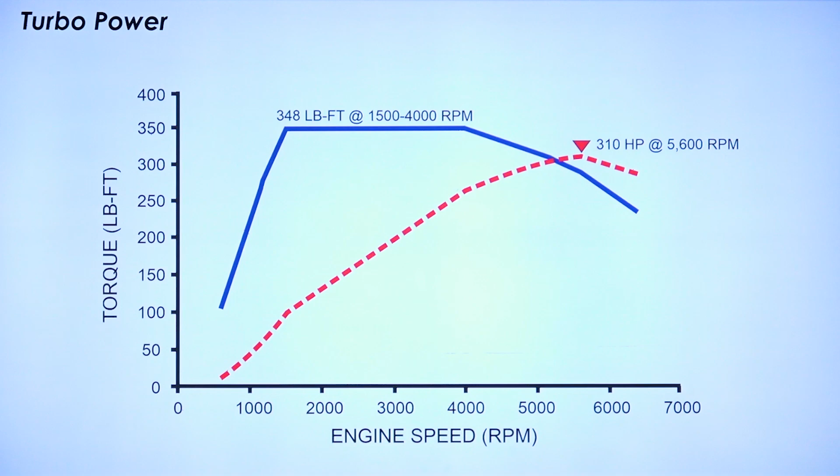So if we look at the torque curve here, you can see it's pretty steep. Power comes on really quickly - 348 foot-pounds of torque, it flattens out right there. Then we look at the horsepower as it comes on and peaks out at 310 horsepower. Now, I grew up in the 80s, I had a 97 Chevy truck, it was the Vortec 5.7. That was quite something for its day, the 350 - I think that thing had like 285 horse. A V8 that's literally more than twice the size of this engine here.

So this thing's got a lot of pickup, excuse the pun, but it drives really well, and there's a lot of technology that goes into it. And that's kind of what we're going to focus on today, is all the new technology that GM brought into this thing to really help it out here and make it what it is today.

There's stuff like a dual Volute turbocharger. Now you're going, how many Volutes am I supposed to have on a vehicle here? Well, I'll explain that here in just a second. It's a different style turbocharger, different internal design. It's got a new evaporative emissions purge pump. While that's not going to affect the performance of the vehicle, it's going to affect the performance of the evaporative emission system. And because of the turbo, that's why we've got this new EVAP purge pump. I'll explain a little bit more about that.

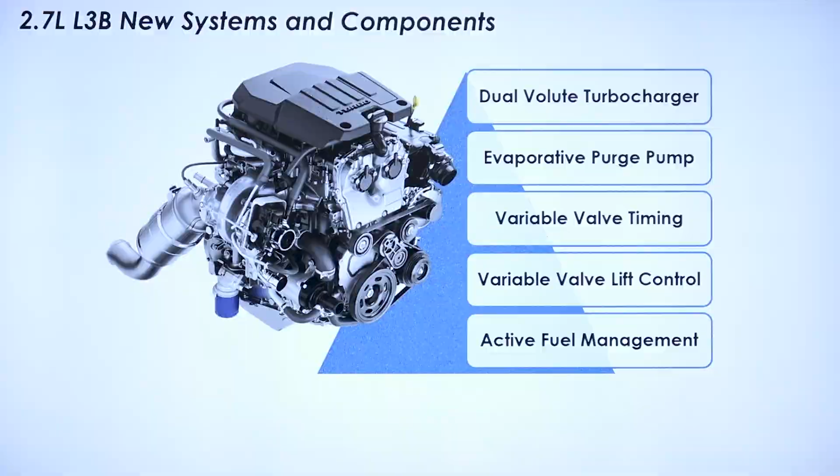Then this truck has a multi-configuration of valve timing. So this is going to have variable valve timing, which will advance and retard each camshaft individually. And then it's got variable lift control, which has sleeves on the camshaft with high and low lift actuation of the valves. It's also got active fuel management, so it can kill multiple cylinders at a time. We're used to seeing that on some 5.3 V8 engines, but GM's doing it with a 4-cylinder engine here - very impressive. So now you put this variable valve timing, variable lift timing, and active fuel management together, and it makes this a really efficient, well-running engine, but with a lot of service opportunities as well.

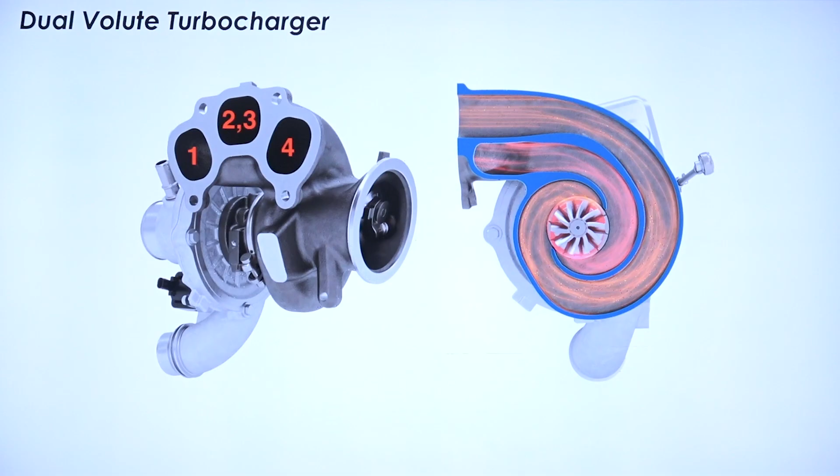As I mentioned with that dual Volute turbocharger, we look at the image here and you can see it's got multiple passageways. What it's really doing is helping balance the exhaust flow coming into the turbocharger. Due to the proximity of it - think about exhaust headers - they're not all the same length. Each tube is wrapped around differently with the goal of scavenging enough exhaust so there's equal passageway before it gets to the common tube there. That's really what's happening with this dual Volute turbo. If we look at this drawing here, you can see where it's located. Obviously the pathway from cylinders 2 and 3 is much closer or shorter than it would be for 1 and 4.

2 and 3 are going to share a common passageway, and then 1 and 4 are going to come a little bit longer route, and they're going to be timed perfectly. So the pulsations are going to be constant and perfectly timed to help improve the efficiency of the operation of the turbocharger on this vehicle.

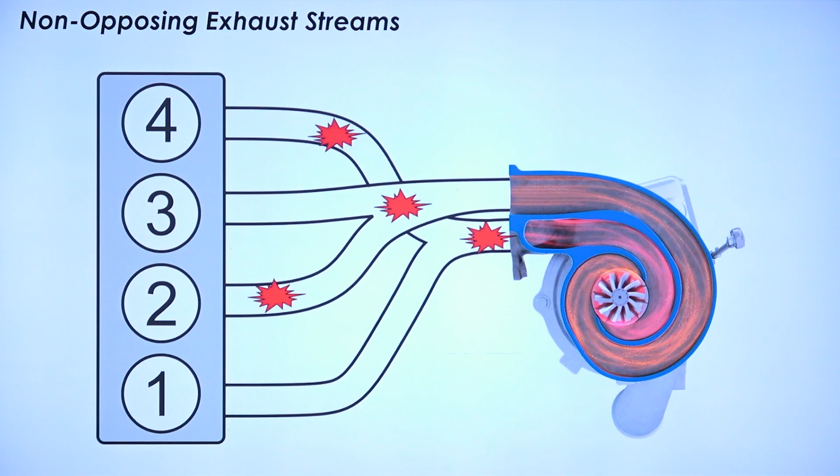Man, I gotta tell you, it builds boost really quickly. I hopped on the expressway with it the other day, very effortless acceleration getting it up to speed. Now, as I mentioned, there's some changes on the EVAP system.

So I'm gonna head over to the drawing here. As we look at this, we've got kind of what seems to be our normal EVAP system. We've got our vent, we've got our purge. Fuel is going to come into the tank here. We've got our fuel tank pressure sensor reading the pressure. It's going to be connected to the vapor canister. We're going to trap or draw in fresh air, whatever is being commanded at the time. So we've got our normally open vent valve.

But then we follow the pathway over here to the purge solenoid, which is going to be closed, attached to engine vacuum typically. However, think about this being a turbocharged engine. In a small turbocharged engine, it's going to be building boost, and we're going to have pressure right here rather than vacuum as we're used to seeing. And so yes, this does go in at the turbo inlet here. That's not a misprint.

So in order to prep this for a time when there is vacuum applied on the engine rather than boost, this thing is going to pre-charge the EVAP system. It's going to draw vapor, vacuum, through this purge pump, and then it's going to pressurize the system right here. So we're going to have some pressure pre-charged, and when the conditions are right—let's say the driver's got their foot off the throttle or it's idling—the purge solenoid can be commanded on, and then the purge gases will be directed into the turbocharger inlet.

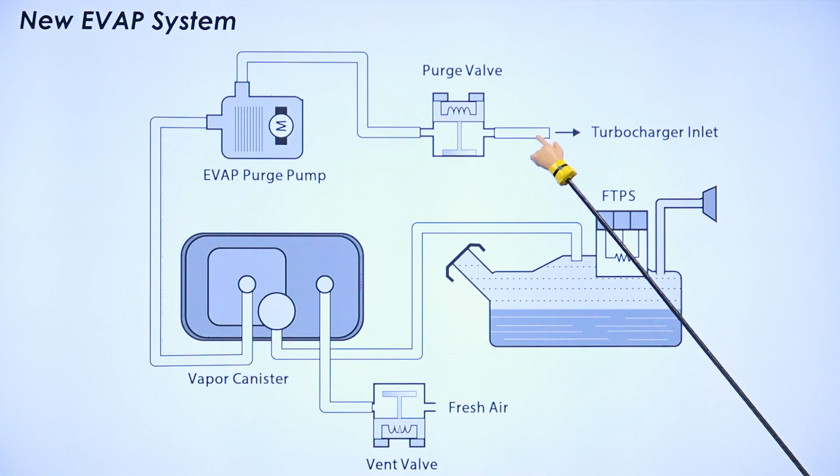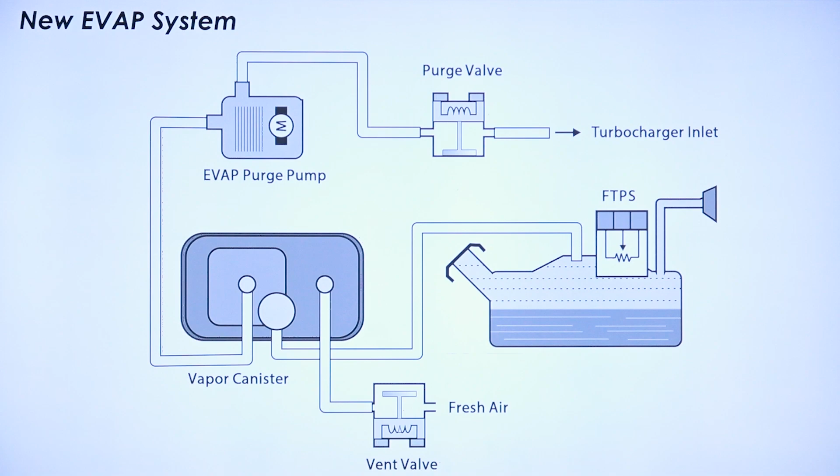So a new component here—word from friends at dealerships is they're replacing a lot of these things. By the time they get out of warranty and come into our bays, who knows? But more parts on a system mean more opportunities for us. So hopefully you understand and can appreciate this new componentry added to this particular engine.

Now I did us a favor here. I've got some covers pulled off this truck. We're going to take a look at it here in a little bit. However, it takes a little bit of work to get this shot right here. We got all the air intake duct work, and imagine it goes down around the side. On the passenger side, it's connected in by the turbo over there. So it takes a little bit of work to get that out. So I just took this picture here.

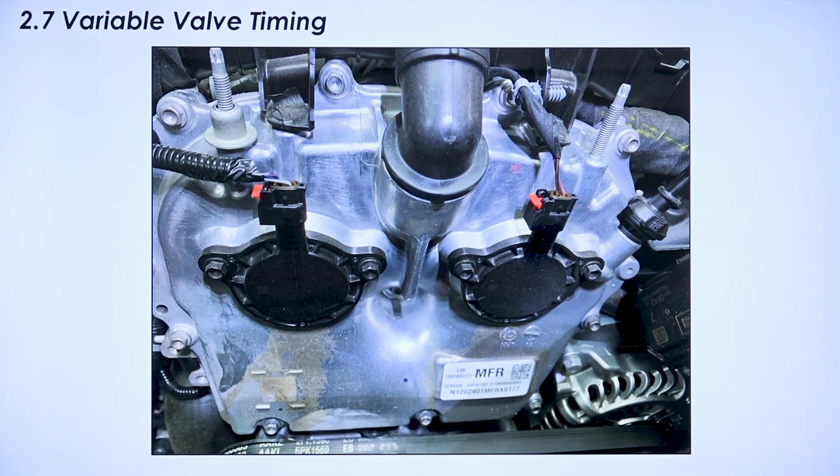Now this isn't like the VVT components I've got sitting on the table here. This is one of the electronically controlled ones. These are more of a hydraulically controlled system on the others, but these are a magnetic solenoid. So if you think about the end of the camshaft or the actuator, the gear on this 2.7 liter engine...

It's got basically a button on the solenoid—think of a ballpoint pen. You click it, it releases it. Now it can change the timing of it. And then it'll click it again to reposition it there. So that's really what's happening on the front of this engine here with these two actuators. These are simply actuating that ballpoint pen, if you will. And now there's a magnetically controlled actuator inside of that.

There's actually a technical service bulletin out for that, so maybe after this is a good opportunity to just pull up in service information, 2022, 2023 Silverado. Yeah, aftermarket service information's got really a lot of good coverage on these things already. Look up that technical service bulletin. I just went under VVT or engine mechanical and then looked at valve timing and searched TSBs. There's some good information stored in there.

But then as I mentioned, there's also the variable lift and active fuel management. In a minute, I'm going to get into this further and show you some shots underneath the hood of the truck. There is some scan tool testing we can do, not as much as I'd hope for at this point, but I'll show you some examples using popular aftermarket tools, stuff we can do if we're testing these things.

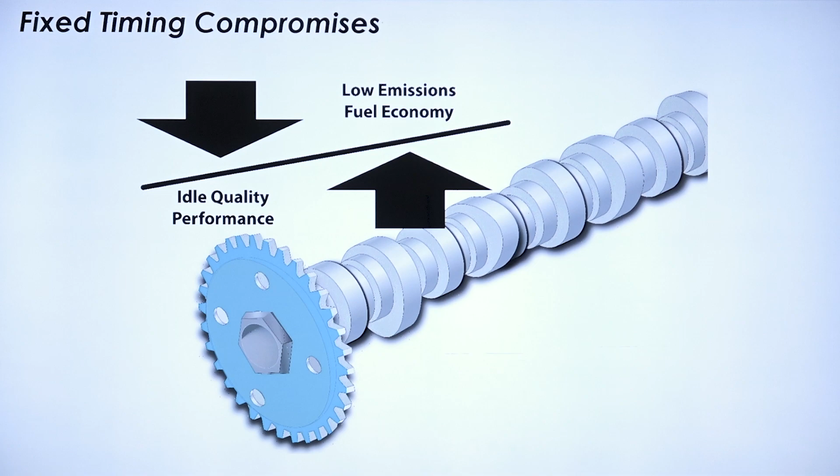But in today's world, emissions come significantly into play, so we've got to balance things out a little bit. Make sure we're getting the best performance we can out of the engine, as well as driver comfort, right? We can't have a big lopey cam here. Some of us might think it's cool, most of our customers aren't going to though. But then we also have to have good fuel economy and clean air coming out the tailpipe. So traditionally, vehicle engine engineers had to balance that out and go, okay, how can I get the best performance out of this cam with the best drivability and the best fuel economy, emissions, etc. Well, now enter the new technologies of advanced valve actuation, and really all that stuff's out the window.

So as we look at the different types available here, we've got variable valve timing, which is going to advance or retard the camshafts one way or the other. Advancing it is going to help us get more performance, but retarding it is going to give some valve overlap and help clean up on the emissions side, give a little bit of internal EGR there.

Variable lift, well, if we don't need to open that valve all the way and get a big gulp of fresh air in all the time, we can help with the efficiency of the engine by giving it really just what it needs at that time. And now put them both together, well, it's kind of the best of both worlds here, and we're seeing that on more and more of today's modern engines.

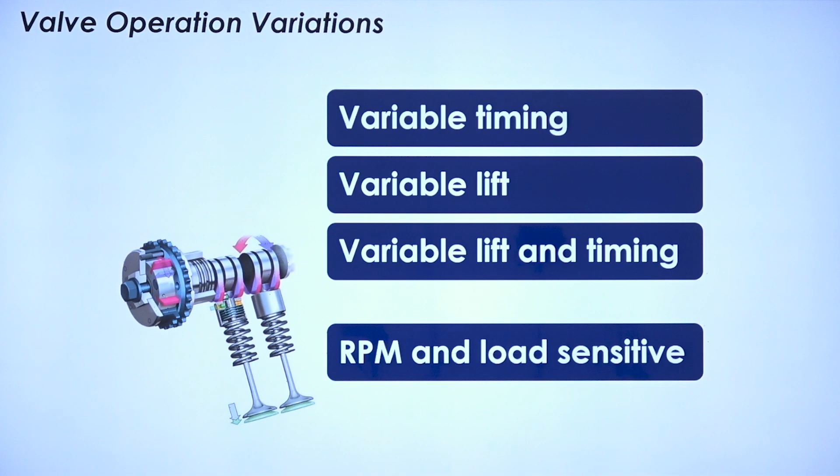And these are all RPM and engine load sensitive. We don't want to be actuating this stuff and making major changes while the vehicle is idling or light acceleration. Typically it's under open acceleration or steady state cruising down the road where the PCM is going to make a lot of these adjustments.

So some of the big benefits here, first off, is increased volumetric efficiency. It allows it to breathe better. And as I've said before, these engines are primarily an air pump. We're getting air in, we're getting air out, we're creating work with a crankshaft in between there. And so the better we can get air in and out, the more efficient this engine is going to be. Advanced valve train actuation certainly helps out with that. On the flip side, it's going to reduce those pumping losses.

Think about if you get a clogged or closed throttle blade, it's a restriction on the air intake. That's how manufacturers for many years have throttled the engine, right? We close the throttle blade, but as the piston's coming down, we're drawing vacuum. That's a parasitic loss, negatively acting on the crankshaft. So by keeping that throttle blade open, we can allow the engine to breathe freer and much more efficient.

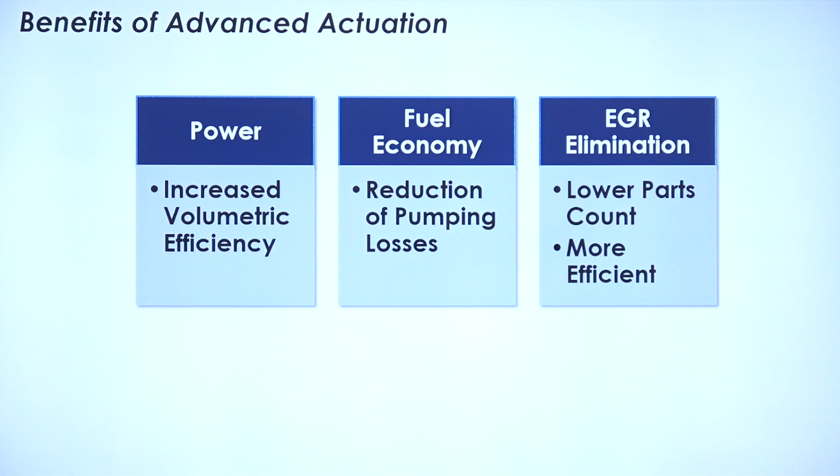Think about early diesels. That was one of the big advantages to them. There was no throttle blade, so it made it very efficient. On early applications, manufacturers simply eliminated the EGR valve because with valve overlap, we could scavenge some of the exhaust into the intake. That would cool down the combustion process and eliminate the need for EGR. Modern vehicles now we're seeing EGRs come back on so it can further clean the process up.

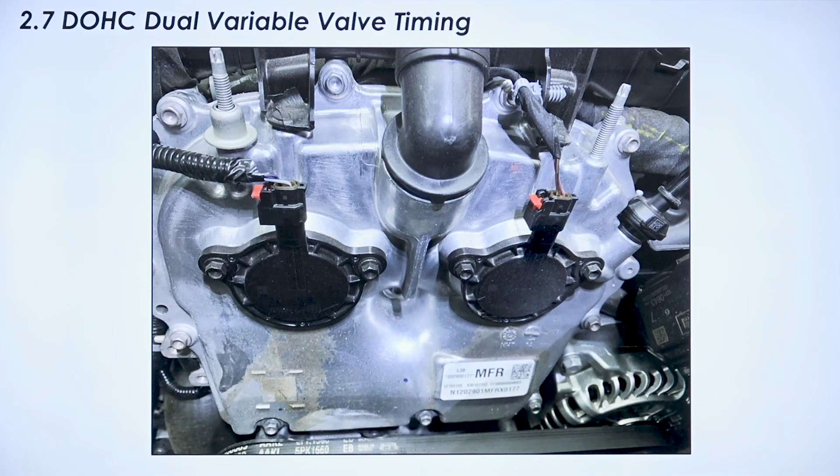As I mentioned and showed you this image earlier, this particular engine has control of both the exhaust camshaft and the intake camshaft. Think about some of the early applications of VVT that you may have worked on. For me, I think of the late 90s Ford, like the Escort with the Zetec engine - not to be confused with the Honda VTEC - but it controlled the exhaust camshaft, and that was normally in the full advanced position, and then it would retard it.

I think it was up to 17 degrees for that EGR effect. As other manufacturers came on board with this, they started advancing the intake camshaft for that performance effect. And then we've got engines like this that control both camshafts - it will advance them or retard them.

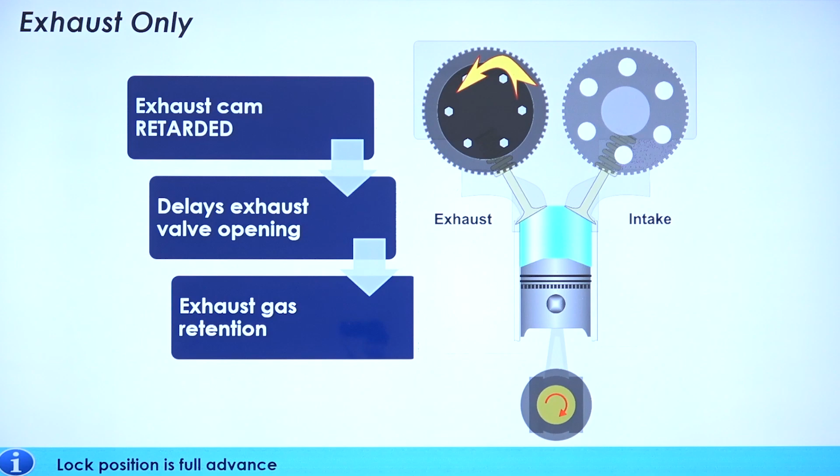So as we look at some examples here, this one being exhaust only, now the exhaust cam is going to be retarded here. By retarding that exhaust camshaft as related to the crankshaft, now it's going to delay the exhaust valve opening, and that's going to help retain some of the exhaust gas in the combustion chamber. Now as the intake valve opens at its normal time, there's going to be exhaust in there. So we're going to get a burst of exhaust, and it's going to pull it right back in. It'll stay in the combustion chamber for that EGR effect.

Now as we look at intake-only systems here, the intake cam will be advanced, and this is going to increase valve overlap. It's also going to have some of that exhaust gas retention.

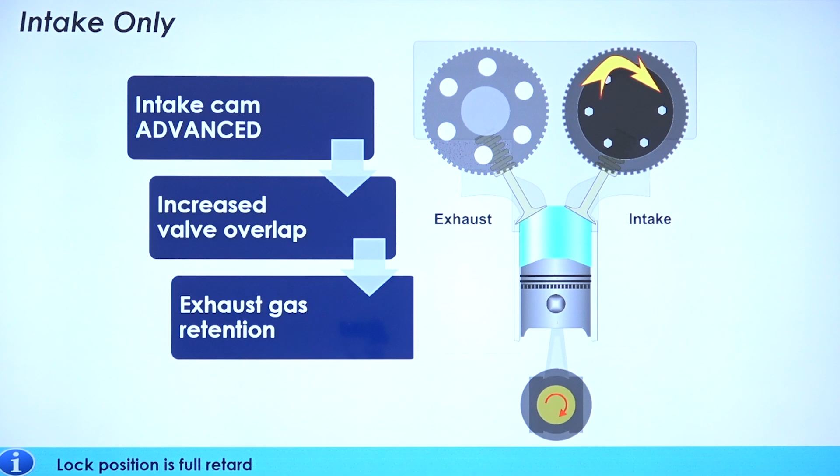But think about some of the hot rodders in the audience today. I see a lot of familiar names logged in here, and I know some of you have played with drag racing back in the day. We used to have gear drives of camshaft, and you're setting up an engine - is this going to be a round track engine that's going to live at high RPMs, or is this going to be a drag race application? We would set up the camshaft timing a little bit different dependent on the needs of that engine. So there's benefits of performance to be gained from the intake opening here.

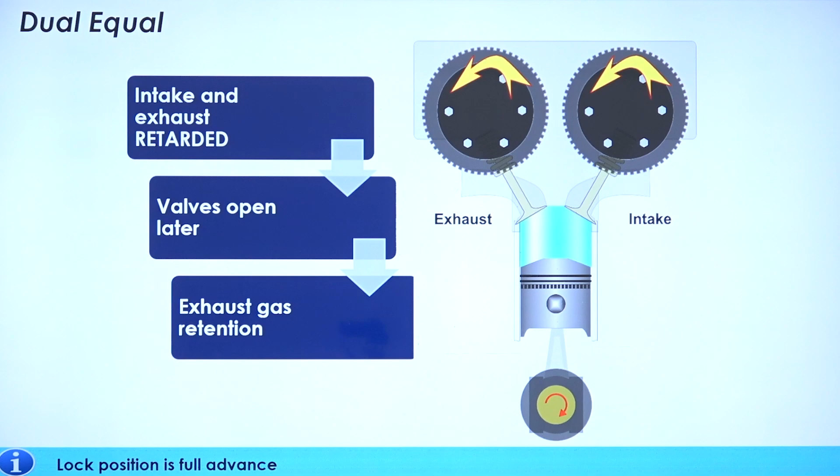Well, over the past 10 years now, we've seen manufacturers using what's referred to as dual equal positioning here. This is where the exhaust and the intake can be retarded, and then the valves will all be open later, helping with that exhaust gas retention. Or dual independent, which we see on today's engines such as this 2.7, where they're both going to be retarded and can be advanced here, and it's going to really help with that engine breathing more so than simply emissions.

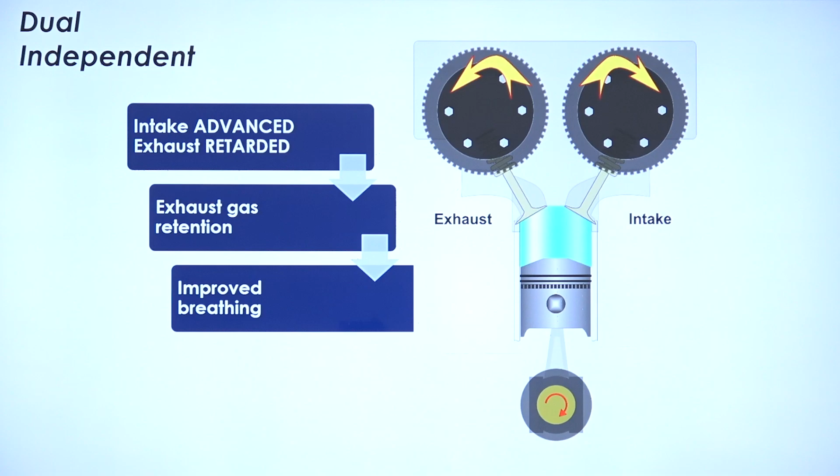So let's move over into the variable valve lift section here. We talked about moving the cams forward and backward, but now we're going to talk about opening and closing the exhaust valves and how far do we open those. You may be familiar with this with the Honda systems - they've been using this for many years. Even I think my wife had a 2001 Honda Odyssey with a 3.5, and I believe that actually had the variable valve opening there.

So as we look at the image here, now under high lift application, which is going to be typically your default, we can see where the valve is going to start opening here at 0 degrees crank. And now as it's being commanded open, we can see the lift, the amount of lift as indicated in the blue trace here.

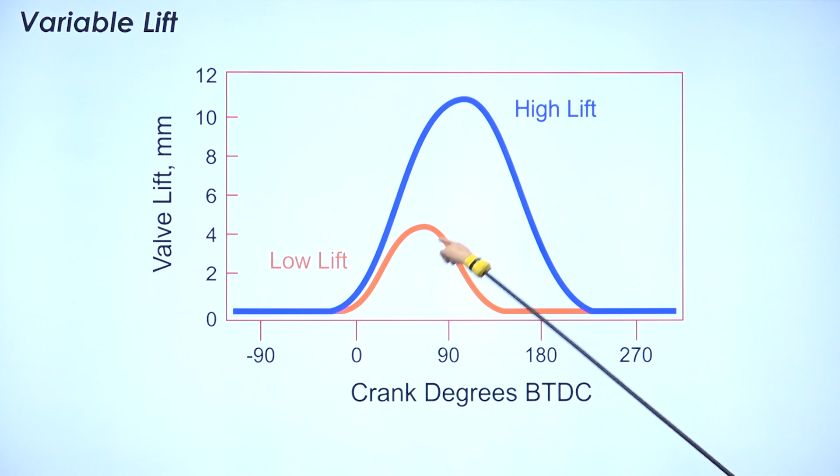Under certain applications and conditions, the powertrain control module commands the system to shift. In this case, it literally slides the camshaft over to apply a low lift opening. This can be done for efficiency, if we don't need all that air in or out, we can get by with this, and that's what the manufacturer will use.

Looking at the components of this variable valve lift system, we've got the valve, which is what we're ultimately attempting to control. Then we've got the dual feed lash adjuster, and the inner switchable roller finger follower, which has multiple rollers on it. You can see the camshaft there, and that's going to actuate against one or the other.

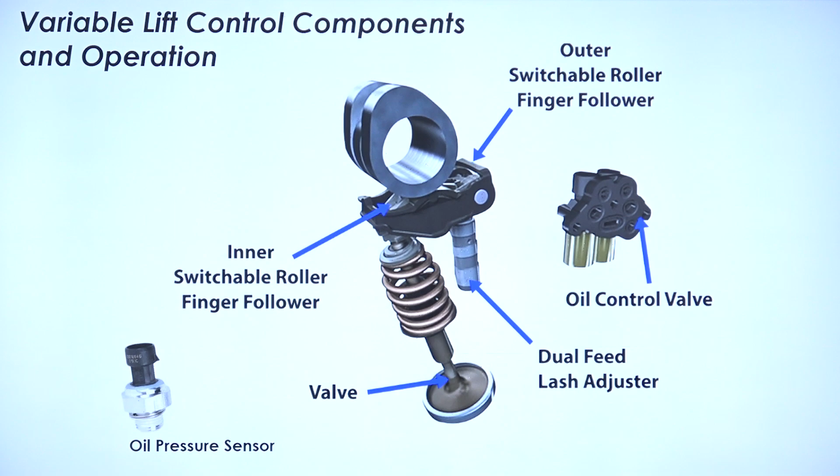Many of these are controlled by an oil control valve, and we've got the oil pressure sensor, which is a feedback device. As we see that state of oil change, it sends oil through a passageway to actuate the system. This pressure sensor tells us yes, I've got oil pressure, or no, oil pressure has been removed. So as we put this together, that's what helps us achieve high lift or low lift valve opening based on whichever is commanded at a particular time.

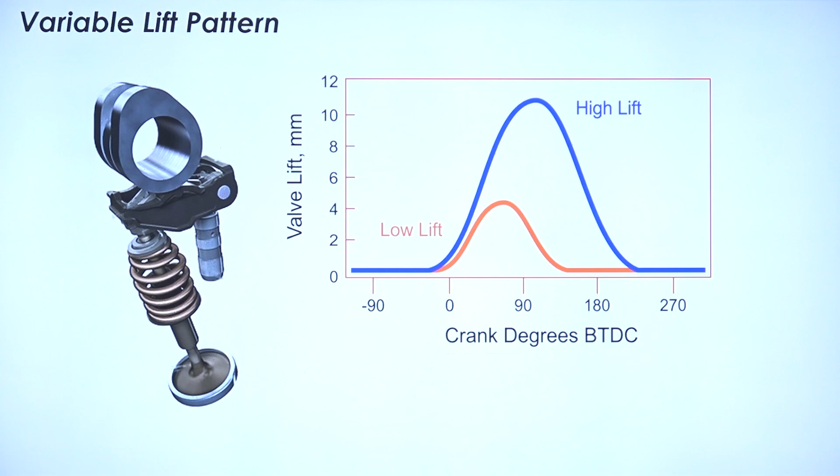Let's take a look at a snapshot we took of this truck earlier. As we look at the scan data, you can see my cursor, and this is a snapshot of what was being read at that point in time. We're cruising down the road at 50 miles an hour, trying to keep it below that 55 mile an hour speed limit. You can see a couple times where we blip the throttle, and at this point the throttle's pretty steady.

Here's our control solenoid valve command on. At this point we can see the oil pressure, which is the feedback from the system, and we can see the engine load changing. But if we look further down, as I get into the throttle a bit further, it's going to command this off. When this is commanded off, it goes to the high lift actuation, and this is where we see the feedback on the oil pressure increasing.

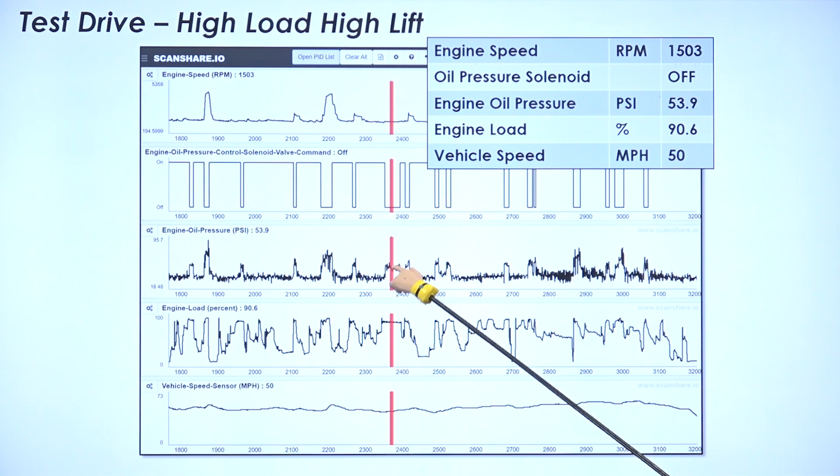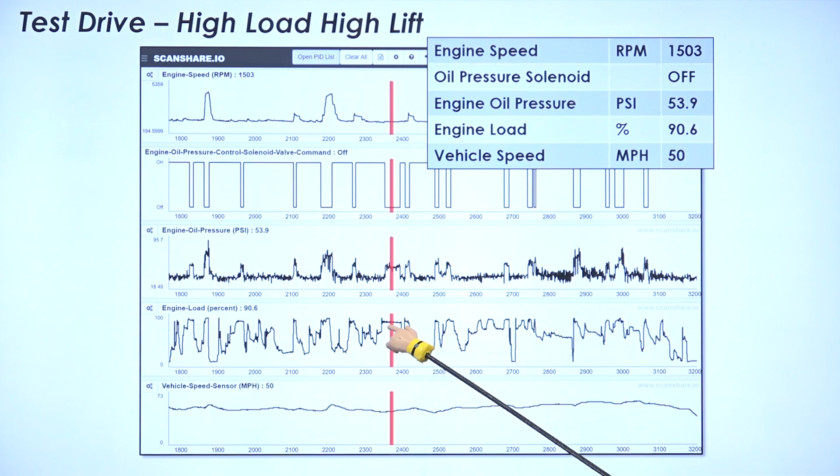We can see just as the system goes on and off, these are the changes occurring. If I fast forward and move the cursor over a little, now we can see where the system is commanded off, the oil pressure will raise. Think of this as defaulting to the off position, which is our high lift system. So when the control solenoid is turned off, we see increased oil pressure, used primarily at higher engine load actuation.

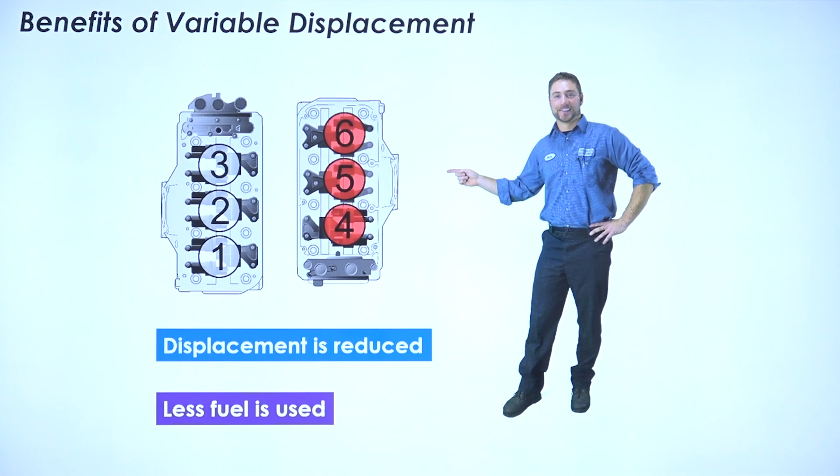That brings us up to variable displacement. This is a 2.7 liter engine, but not always, that's the max capacity of this engine. If you think of other V8 or V6 applications, the control module would cut out various cylinders at different times to help improve efficiency. One of the biggest examples of this in recent times has been the 5.3 liter General Motors application. So how is that accomplished?

First, it's going to disable the valve opening, done through various methods, which I'll explain in a bit. At the same time, we want to disable fuel, but never do we want to disable spark. The engine or vehicle manufacturers don't want to disable spark. We want to get rid of fuel, because imagine if the valves were closed, we're not breathing, not taking fresh air in, not getting rid of exhaust, but the fuel was continuing to spray. It's going to be a flooded cylinder, you'll wash the cylinder walls down, you might hydrolock it. That's why fuel has to be disabled.

But who cares if there's still spark there, right? So it's very difficult to turn the ignition on and off, or there's really no need to do that. So it's going to disable the valve opening, which is going to create kind of a cushion as that piston continues going up and down.

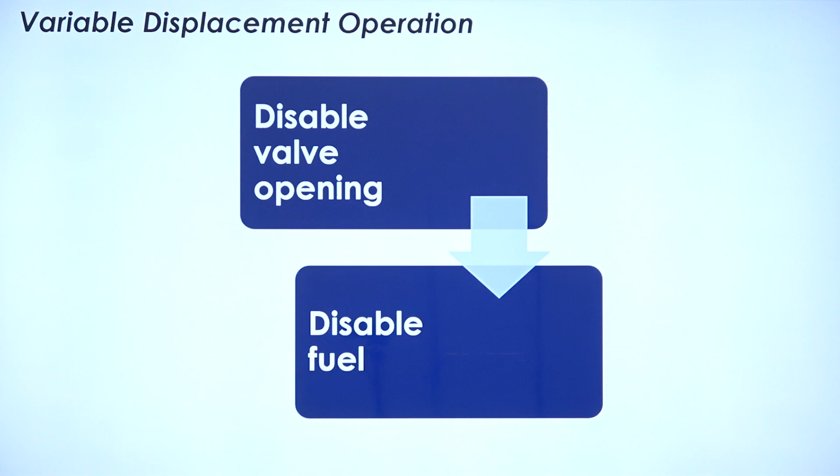You might think, well, it's going to drag or it's going to compress. Well, what it does over time is it builds kind of a spring-loaded cushion of air inside there. If you close both valves, now it's going to go down and it's going to have a spring pressure down, and then it's going to have a little bit of resistance, but then on the way up it'll have that opposite effect. And so it kind of equals itself out at that point.

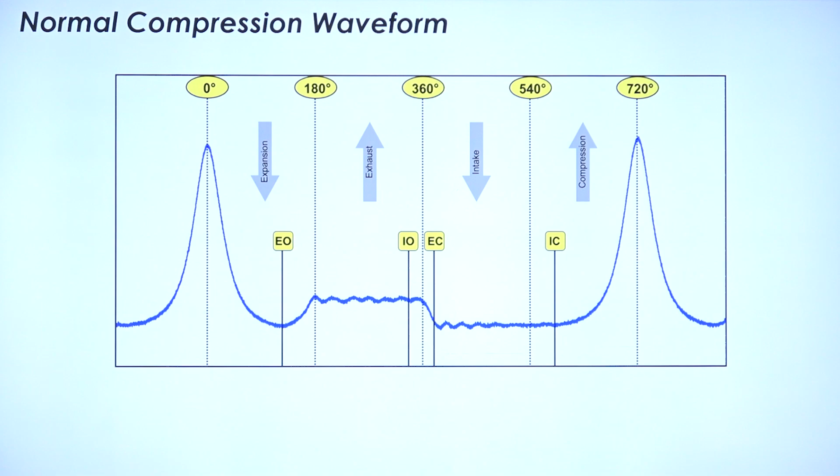So again, if I step over here to the side and if I look at a typical in-cylinder pressure chart, some of you might be very familiar with this, some of you this might be very new to you, but what we've done here is removed the spark plug. We've threaded in a hose with a pressure transducer.

So 0 degrees right here is going to be top dead center. So imagine the piston coming up. So this is building max compression. And now this is where we would have ignition typically. So now we're going to have the power stroke. And so after ignition, it's going to cause that explosion. It's going to force that piston down.

So as it comes down, now the exhaust valve will open up. As that piston starts coming up again, it's not going to build the peak pressure like it was over here because that exhaust valve is open. So that exhaust valve open, it kind of plateaus off right here. Before that exhaust valve closes, intake valve opens up. And so now that piston starts coming down again at 360 degrees of crank revolution, right?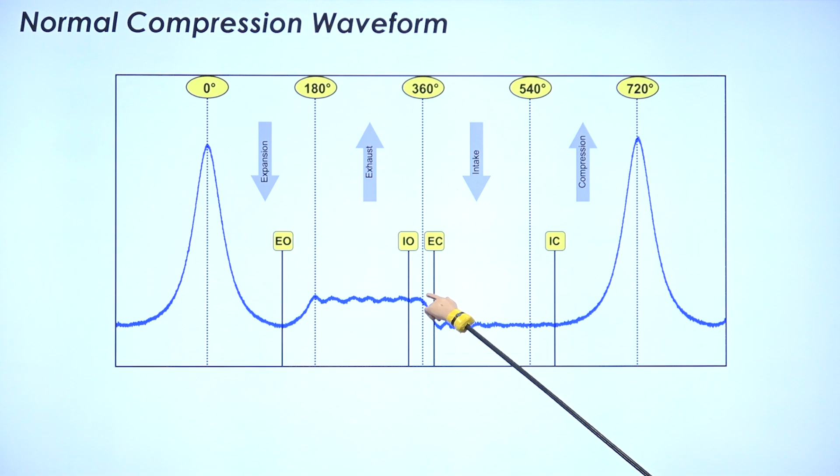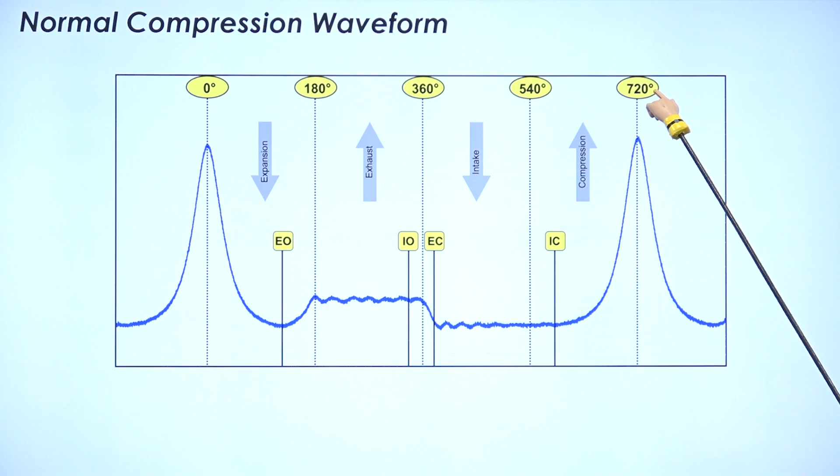So we've got 0, 180, 360 degrees of crank revolution. We've got intake open, exhaust closed. And so this is going to be that intake stroke. Now as the piston is coming back down, on the intake, it's going to draw a little bit of vacuum as seen here, and then we're going to start the process all over again. Once that intake valve closes, the piston starts coming up. The 720 mark, or the 0 mark of the next stroke here, we can see it's building compression. So we've got all 4 strokes of the engine operation illustrated right here.

So let's do this on one of these engines that's got active fuel management. We can see the strokes occurring here, right? Compression, expansion, or power as it would typically be called, exhaust, intake, and it repeats itself, repeats itself.

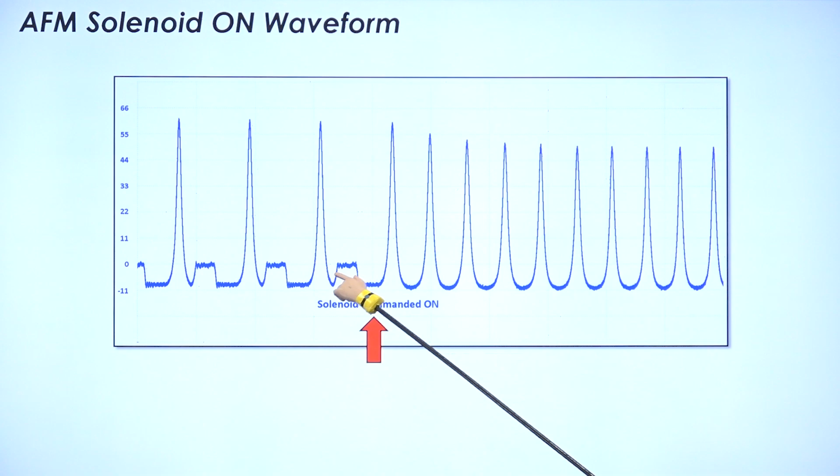Now as we kill the valves, what happens? We're still building pressure because the piston's coming up with valves closed, we're going to build pressure there. But we're not seeing that exhaust event, so it's kind of building pressure. It's building pressure, it's building pressure. But you see this trend here, how over time it's kind of settling itself down.

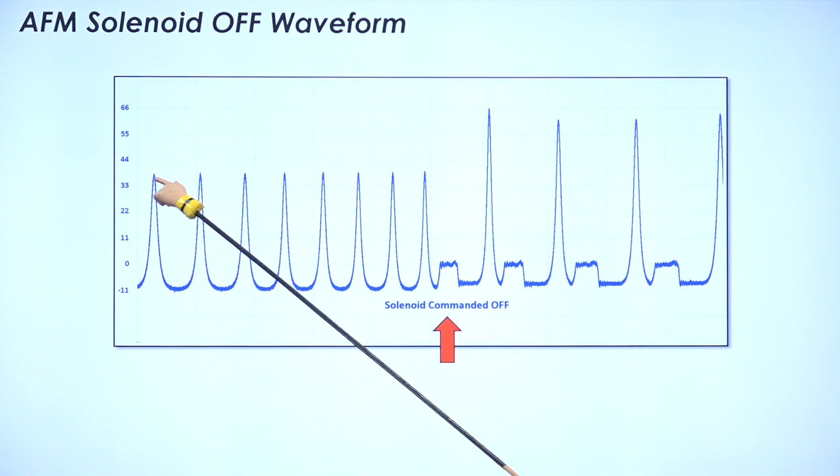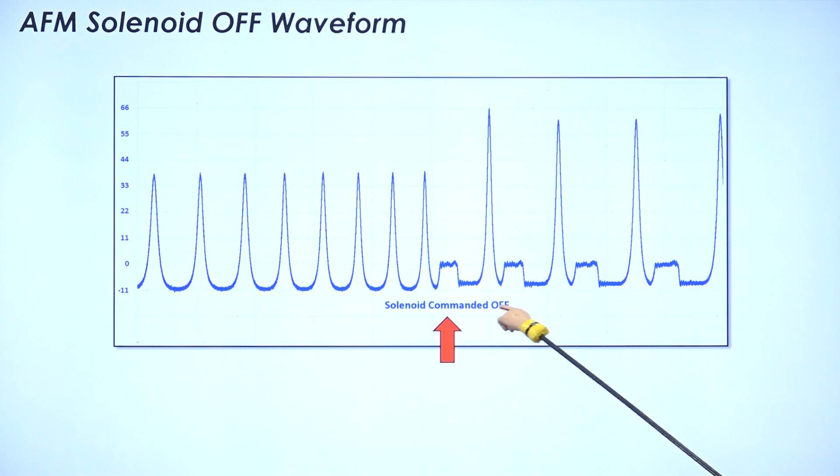And so as it continues to run here, you know, we might have compression, exhaust, compression, exhaust, compression, exhaust. We turn that solenoid or the AFM system off. Now all of a sudden on that exhaust stroke, now the valves work again. And so we're back to our normal 4-stroke operation here. So hopefully you understand a little bit of what happens when that control solenoid is actuated in the system there.

So General Motors is one of the most popular applications of active fuel management. Many shops have probably benefited from servicing these things or possibly even deleting them. I've seen a lot of shops do that. Personally, I prefer to put the vehicle back to the way it came. It was built that way for a purpose. And so a lot of service opportunities on working on these things.

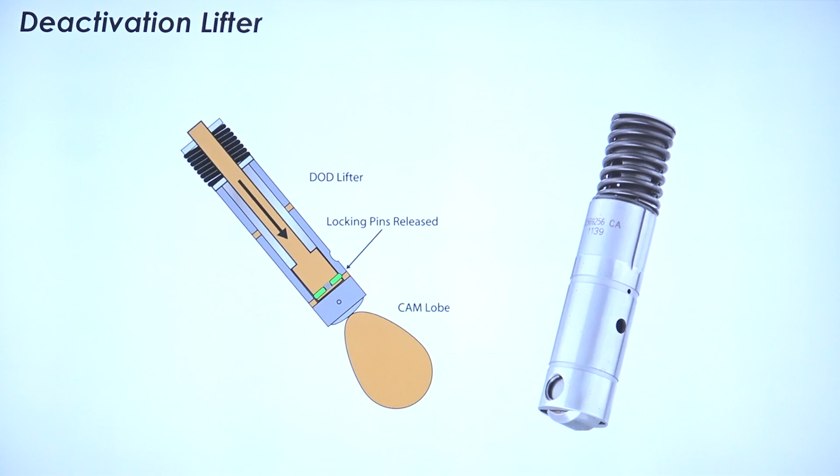But as we look at the lifters, on these GM 5.3 example here, you can see the cam lobe on the bottom. It's a roller lifter, so it's actuating or riding on that lifter. Then there's locking pins in there. Those are being commanded open or to be released via oil pressure or hydraulic pressure from the oil there. And so once those pins are released, this lifter is going to collapse against itself and shrink, which is going to have an effect on the valve opening.

So this is a picture I took of my father's truck, 2013 Chevy Silverado with a 5.3. He's one of those guys that drives staring at the fuel economy the entire time.

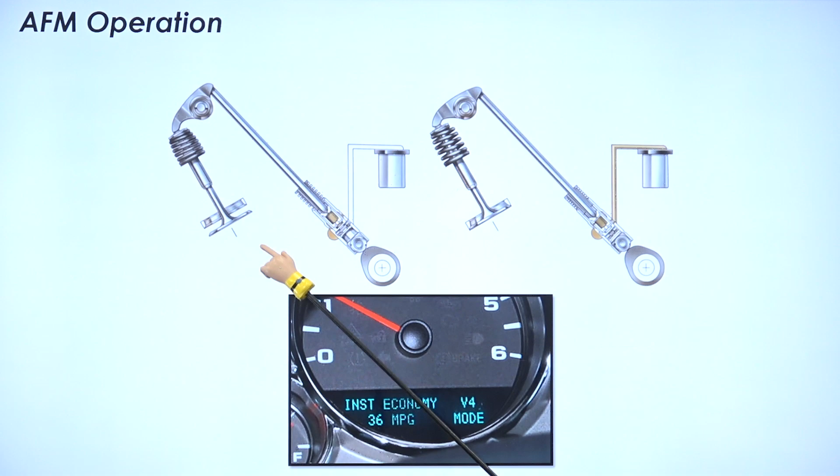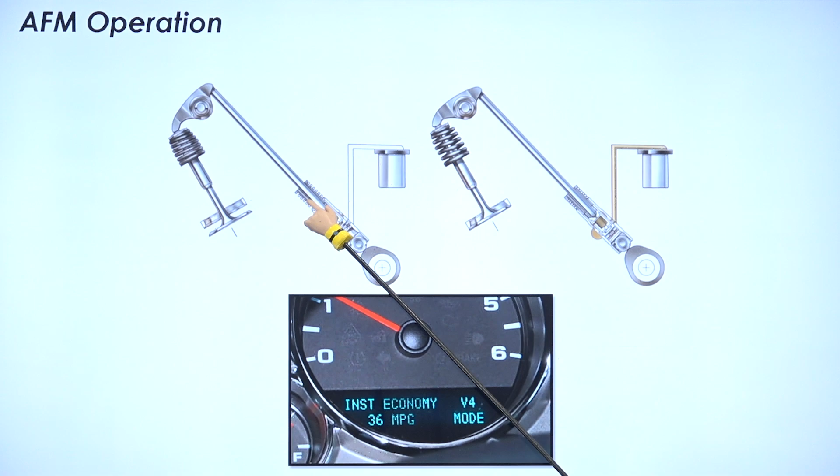So he very much appreciates this mode here. As I grab my pointer, we look at this example where there's no oil being sent to the lifter. So the pins are going to be extended, and this is going to be a full-length lifter at this point.

So it's going to actuate and open the rocker, opening the valve. On this particular one, we've got oil being commanded to it, which is going to release the pins. That lifter is going to collapse against itself, and it's not going to open the valve when it's in V4 mode.

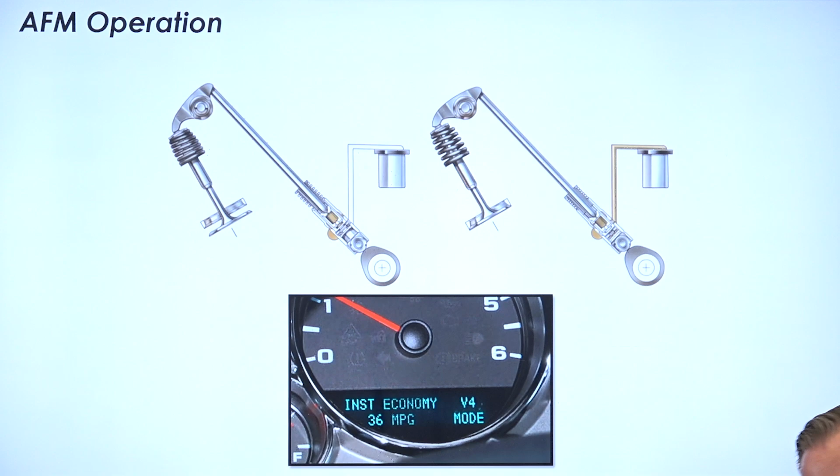So as we look at the manifold, I happen to have one in studio here. I actually pulled this off a vehicle myself recently. This is one we were doing some testing on for a newer GDI application. You can see where the pump would be located right here, and you can see the multiple solenoids. In that particular vehicle, it's going to kill cylinders 1, 7, and then 6 and 4.

So the outer two cylinders on the driver's side and the middle two. That's going to give the engine some balance there. And so we've got various control solenoids. Then as you look, you're going to see the passageways where the oil will be sent to or returned. So a lot of you might be familiar with that system there.

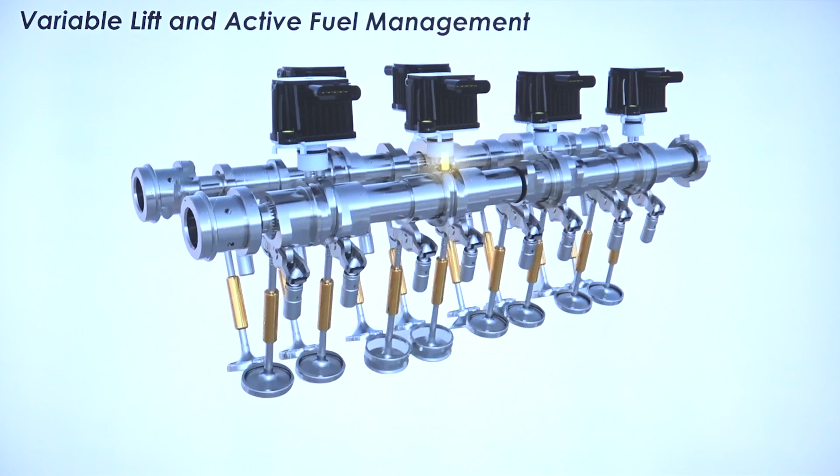So this GM 2.7 liter here, now again, we put everything together. They're using the variable lift and active fuel management setup here in comparison. Now it's kind of hard for me to explain, but there are these cam sleeves, as I talked about earlier, and now you can see that drawing of the solenoid, and there's 2 pins there.

Under proper application or command, it's going to drop one of those 2 pins. And what that pin is going to do, it's going to fall into that little channel there, and you can see that channel is eccentric, not straight up and down. And so as that pin drops in there, it's going to cause that sleeve to shift one direction or the other.

I can try to explain this all day long, but Corey grabbed a video from the GM website here that explains it way better than I could. So I'm going to ask him to quick pull that video up a second, and let's take a look at that.

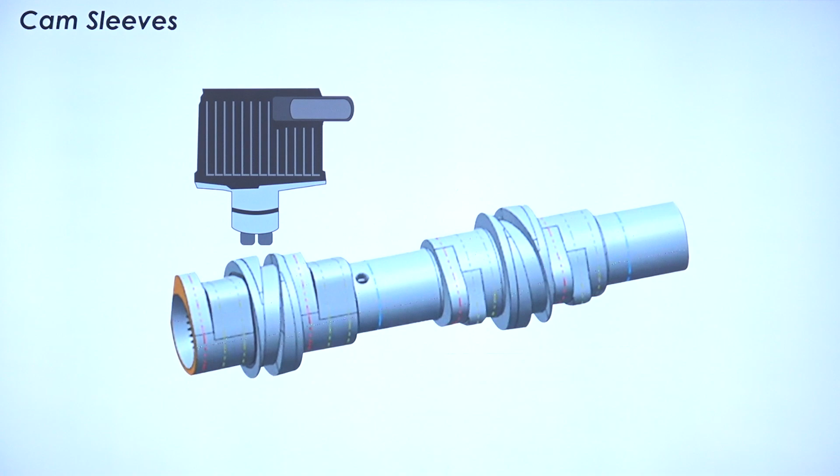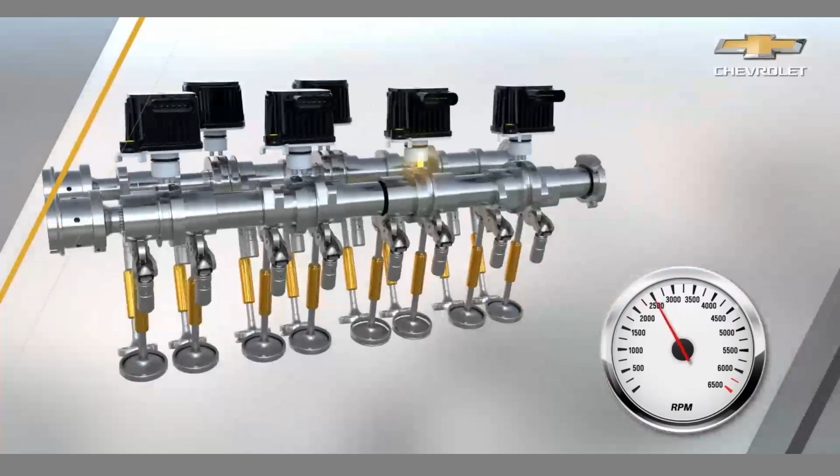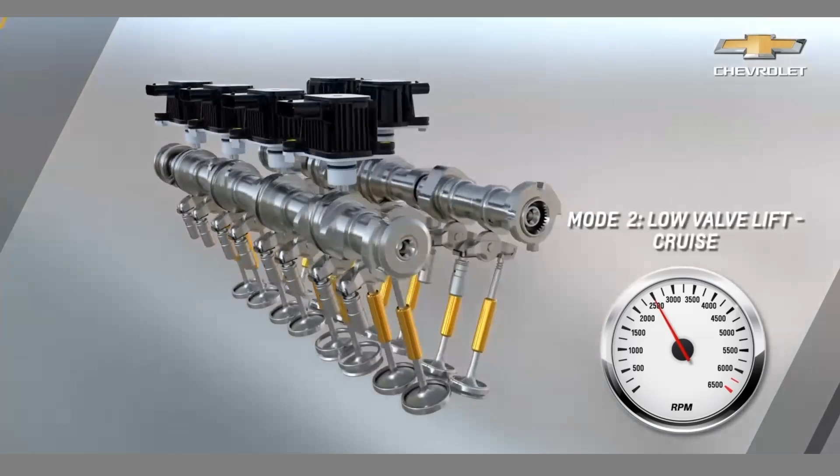We can see the system inside of the engine. Now under full power, we're going to have the high lift, but as that pin has been actuated, you can see that cam slid over there, and it's going to move it to low lift for steady cruise. Now under the right conditions, it's going to kill the middle two cylinders. We'll just run on cylinders 1 and 4. But as the driver rolls into the throttle a little bit more, it's going to reactivate those cylinders, still under low lift mode. And then if the driver really starts to want to accelerate again, it's going to change it over to the high lift mode, and it's going to give the engine full power.

All right, so hopefully that helps you understand a little bit about how this thing works. And so really I want to just kind of share the control layout here. We can see on the intake, we've got the multiple components here.

And so we've got the solenoids for cylinder number 1, which is going to give us the difference between high lift and low lift. And then cylinder number 2, it's going to give more options, significantly more options. Same with 3 and with 4.

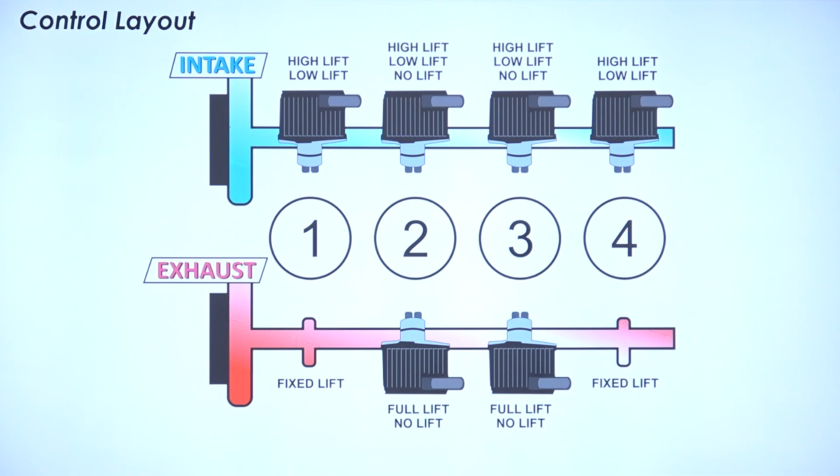So let's take a look over to the truck here. We've got the camera set up, so let's take a look at some of these components on the truck itself. So we've gone ahead and removed the cover here. There's obviously an engine cover, which is going to help control the sound.

You can see we've got the GDI pump located right here. It's going to be run off this exhaust camshaft. And so you can see these control solenoids as mentioned. This is those solenoids with the 2 pins. Now the camshafts run underneath here, and then we've got the ignition coils located in the center here.

So if you're going to do a tune-up on one of these things, it's really pretty easy to get these ignition coils out. But you can see all these different solenoids located on the engine here. And as we showed earlier on the drawing, the intake cam, there's going to be 4 of them. On the exhaust cam, there's only a control solenoid on cylinders number 2 and 3.

Okay, so we see some of the components on here. These are, again, really easy to get off. You'll see those 2 different pins in there. But that being said, let me go ahead and start the truck up and pull up a little bit of scan data here.

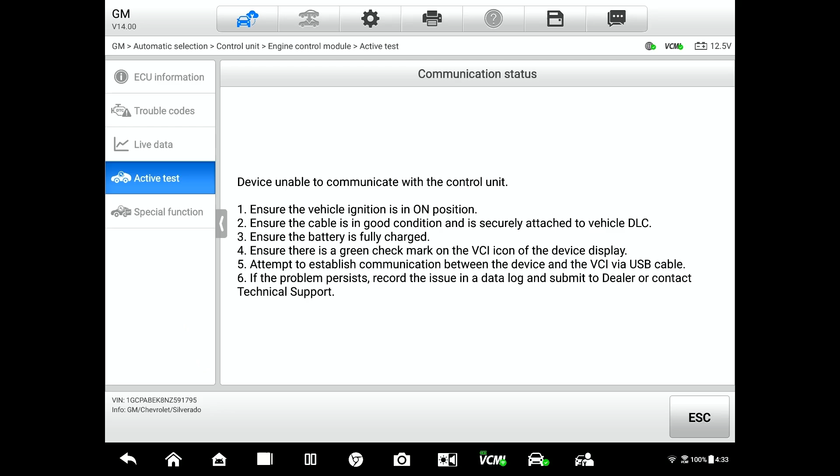Okay, it's got the truck started there. I'm going to back up.

That's one thing you're going to have to learn as you go along through these things. If you look up in service information, you look up camshaft actuator, one version is going to talk about those components I just shared with you on top, which control the cam sliding sleeves. But if you look at a different avenue of it and look up VVT, it's going to talk about the cam actuators on the front, and it's going to call them the same thing. So you've got to be careful, especially if your service writer is writing a quote or something like that. You've got to find out exactly which one you're talking about.

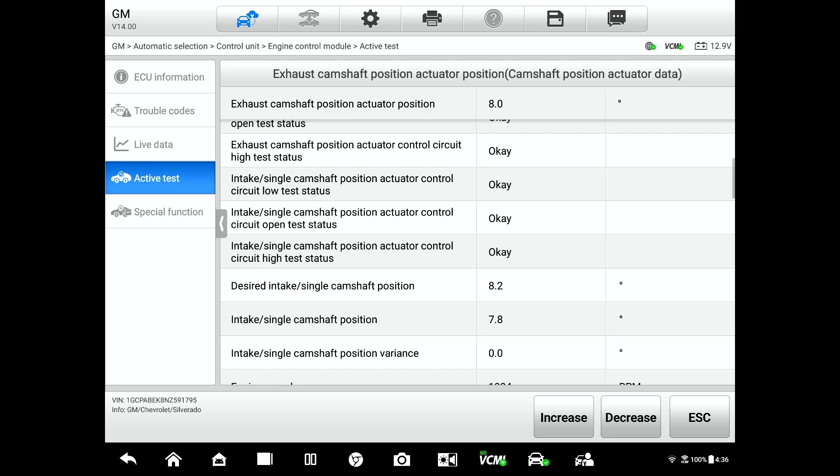So I can ramp this up and down. I can scroll through, I can look at my circuit data, I can see my desired and actuals there as well. I can see that this is synchronized. You know, if you remember back to one of our earlier sessions, we talked about the importance of cam and crank sensors and the accuracy of those.

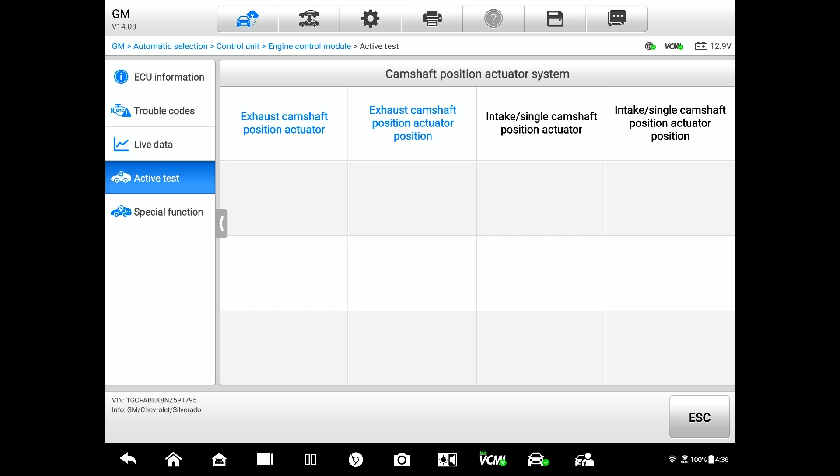So a lot of pretty good information here. I still wish I could get a few different commands available from this yet, but again, I'm quite well pleased with what I can see on these ones. Go ahead and kill the truck there, Corey. So we've got some pretty good diagnostic information here. In a perfect world, I would have a lab scope set up if I'm trying to diagnose one of these, and we get pretty decent information there.

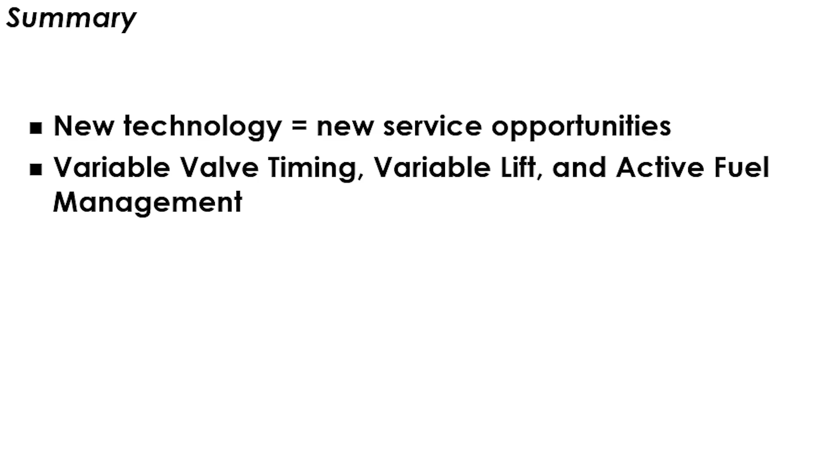So to kind of wrap up here in summary, there's a lot of new technology on this vehicle, which means new service opportunities. If I was in the shop yet, I'd really be encouraging my customers to buy these things because there's a lot of stuff on here, which means a lot more stuff to fail, a lot of stuff that's going to keep me in business for years to come. It's pretty cool how this uses a combination of not just VVT, which we're highlighting this month, but also variable valve lift and active fuel management. So it really puts the three of them together to have improved performance, improved fuel economy, and great tailpipe emissions.